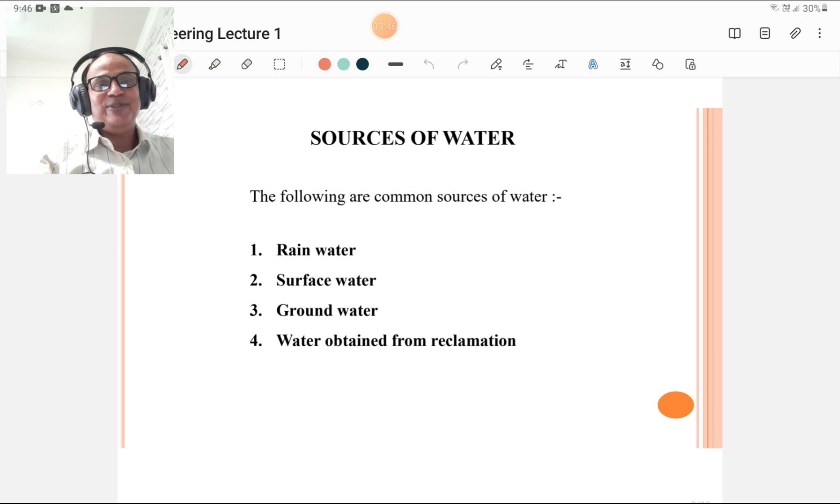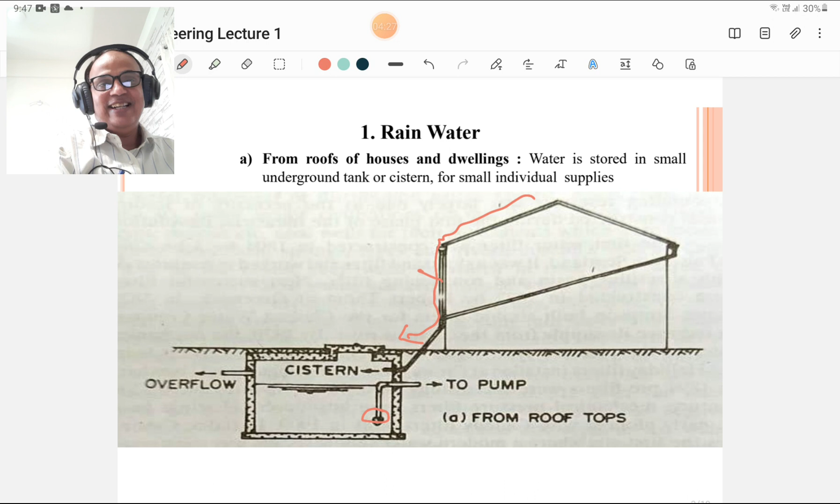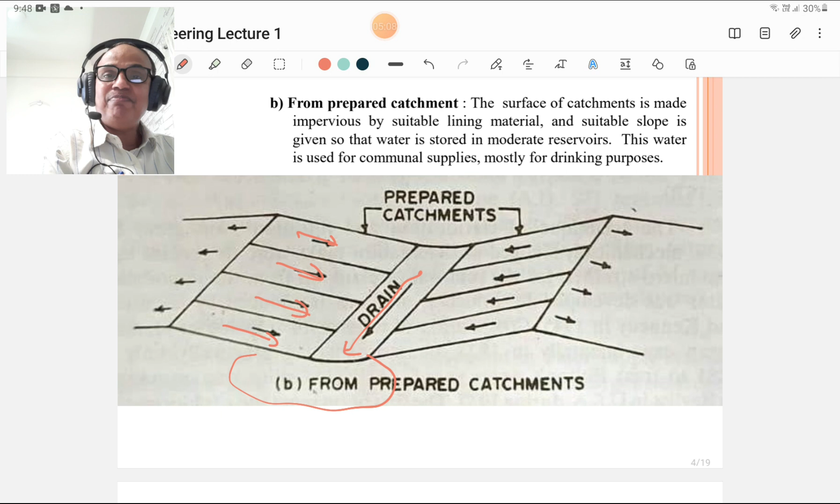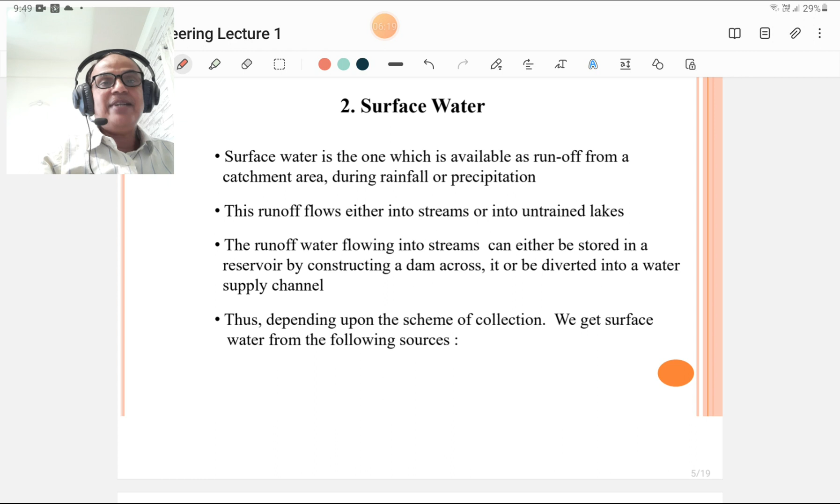Runoff water flowing into streams can either be stored into a reservoir by constructing a dam across that river, or diverted into a water supply channel or canal. Depending upon the scheme of collection, we get surface water from the following sources. Surface water is nothing but rainwater which is precipitated, and we collect that precipitation from the surface.

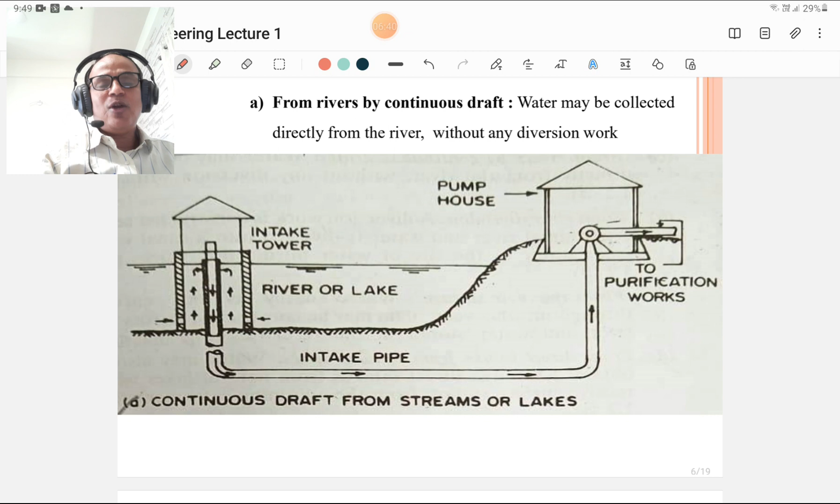From rivers by continuous draft, water may be collected directly from rivers without any diversion work. We can lift that water and collect it. Such as in Solapur district, we collect water from the Bhima river for supplying water to Solapur city.

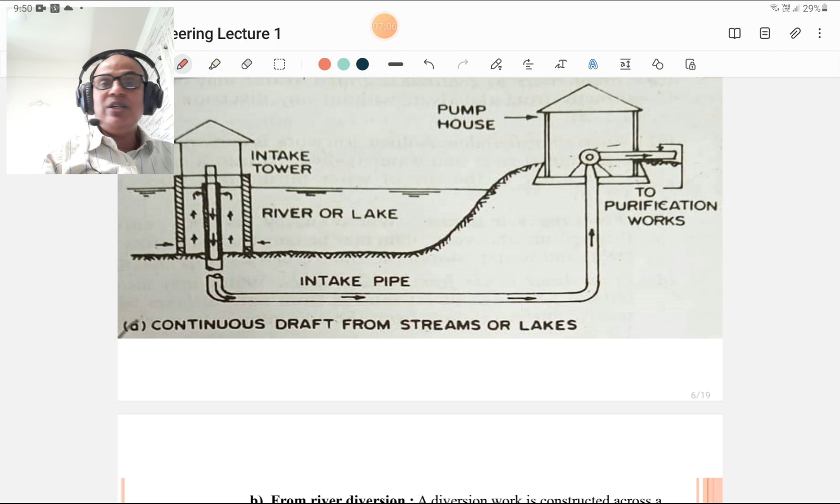But it requires continuous draft. If there is continuous draft, we can lift that water from the jack well and transfer that water to the purification plant, and that purified water we can supply to the city or local people.

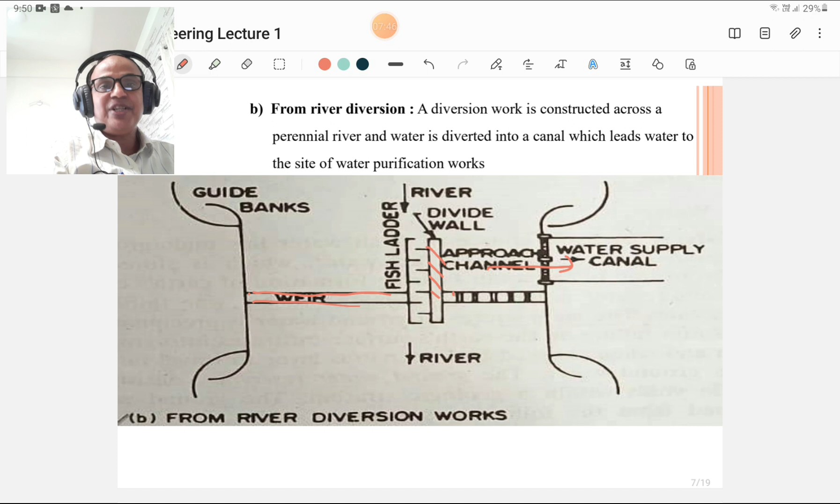Second, from river diversion - we already studied irrigation engineering and we know about diversion works. We have to construct the weir, just like a dam structure. We have to construct the divide walls in that weir, and construct the guide banks also, and divert that water from the river to the canals. Such work is called river diversion work, which leads water to the site of the water purification plant or works.

Third, from reservoir storage, where supply is not ensured throughout the year, a dam may be constructed across the river and water is stored in the reservoir. This is the common and usual procedure because nowadays the supply of rivers is not perennial, so we have to construct a dam across the river and store sufficient water to supply to the city.

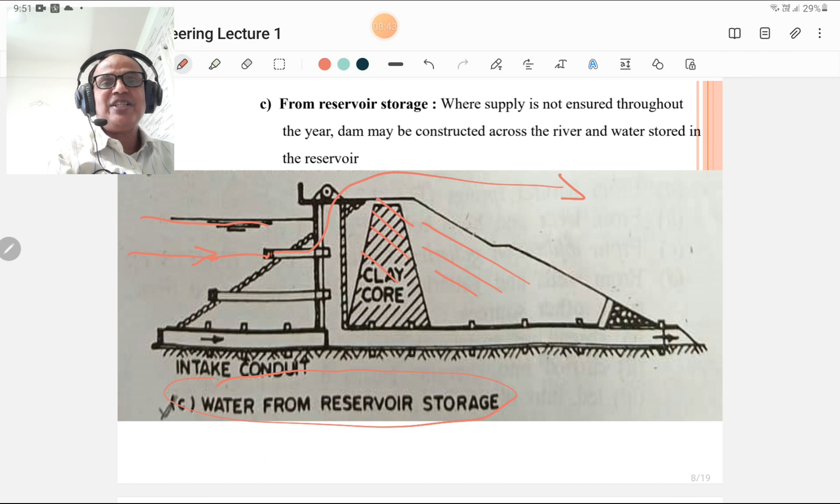This figure shows water from reservoir storage. This is the clay core, or this dam-like structure, an earthen dam, constructed across the river. We collect that water and transfer it to the purification plant to supply it to the people.

Then from direct intake from natural lakes, water may also be obtained through direct intakes from natural lakes which receive surface runoff from adjoining catchments. If there are lakes in the city nearby with natural streams feeding them, we collect water from the lake, which gets water from the nearby catchment. So it requires continuous draft or storage, which is very important for water supply.

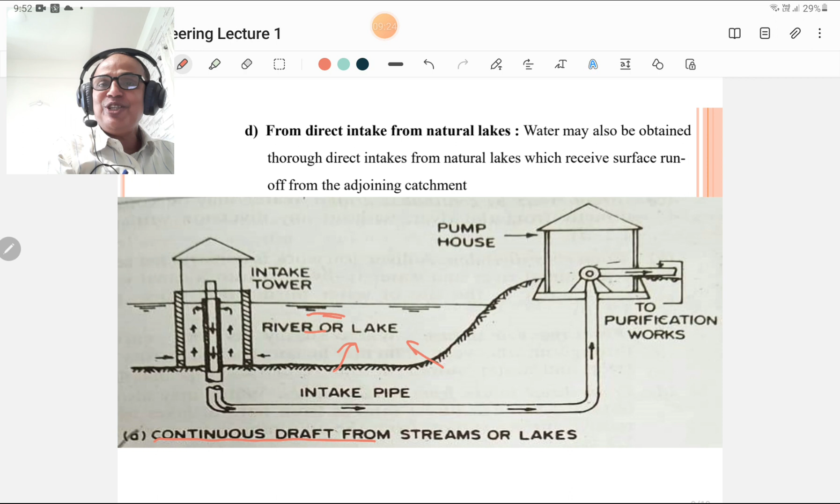Groundwater, which we studied in hydrology also, is the third type of source of supply. This is the largest available source of fresh water, lying underground. The term groundwater refers to water stored by nature underground in the water-bearing stratum or formation of the earth's crust. The total groundwater potential is estimated to be one-third of the capacity of the ocean. So tapping groundwater is very important, but people don't know about this and are not tapping that groundwater.

The main source of groundwater is nothing but precipitation, because in the hydrological cycle, evaporation and precipitation continue forever, and a balance is maintained between these two. Such a cycle of evaporation and precipitation is termed the hydrological cycle, which is very essential for every life.

A portion of rain falling on the earth's surface infiltrates into the ground and travels downward, and when checked by an impervious layer that prevents further downward travel, it forms the groundwater. Any impervious layer allows the formation of groundwater storage. The groundwater reservoir consists of water held in the voids within a geological stratum.

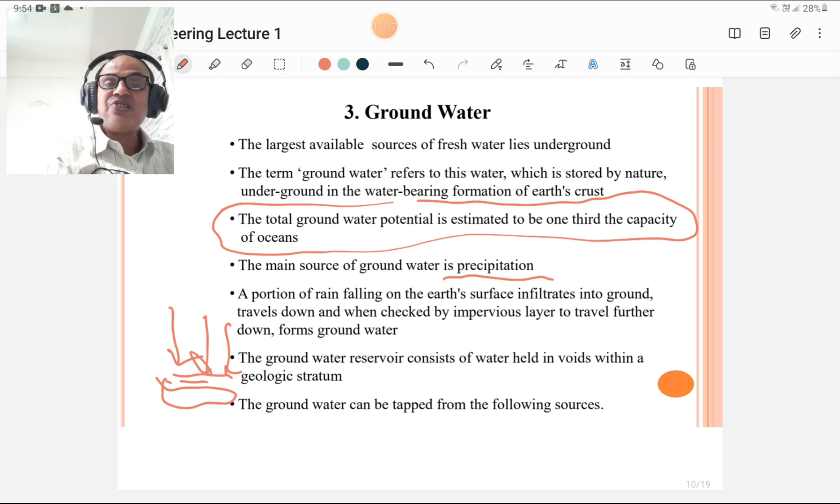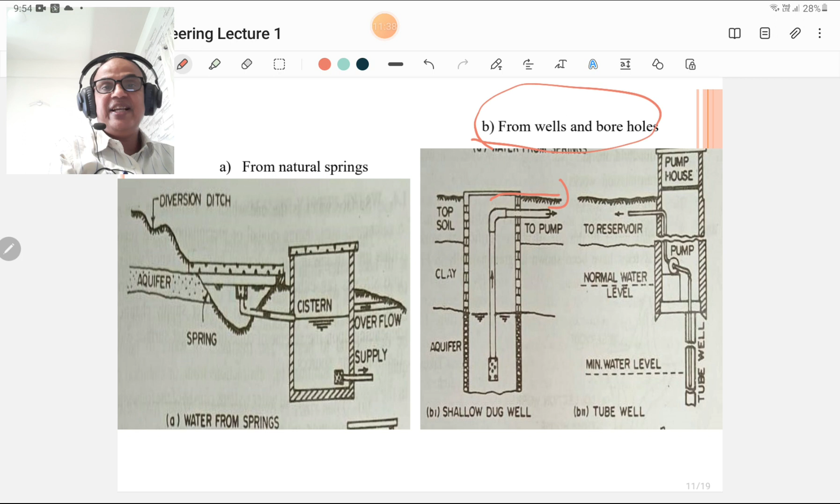The groundwater can be tapped from the following sources. From natural springs, we can tap groundwater. From wells and boreholes, this is very important. Farmers construct wells and boreholes to tap water and use it for irrigation, drinking, and other purposes.

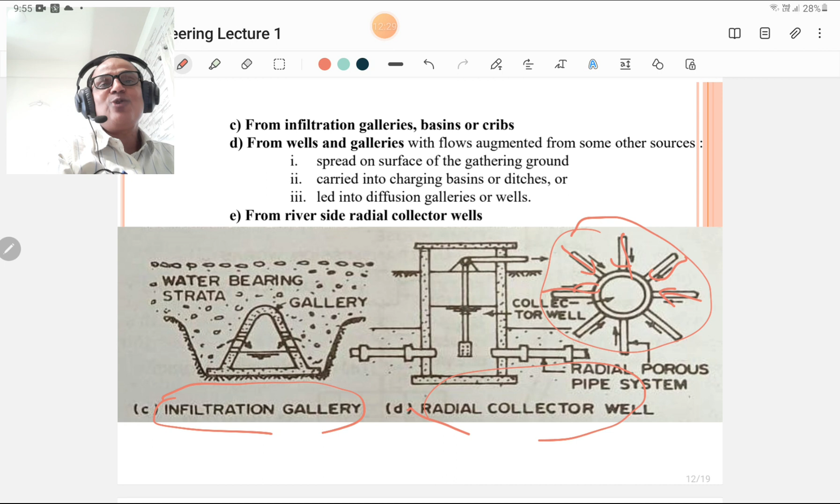From infiltration galleries, basins or cribs. From wells and galleries with flows augmented from other sources, spread on the surface of the gathering ground, carried into charging basins or ditches, or led into diffusion galleries or wells. We also collect groundwater from wells and galleries, or from riverside radial collector wells, which collect water in radial directions. This type of well is called a radial collector well, which is most popular nowadays, and we can also use infiltration galleries to collect groundwater.

Now we discuss the last source of water, obtained from reclamation, which nowadays has more importance. First is desalination. Saline or brackish water may be rendered useful for drinking purposes by installing desalination plants. The common methods used for desalination are distillation, reverse osmosis, electrodialysis, freezing, and solar evaporation. One must study all these methods for desalination.

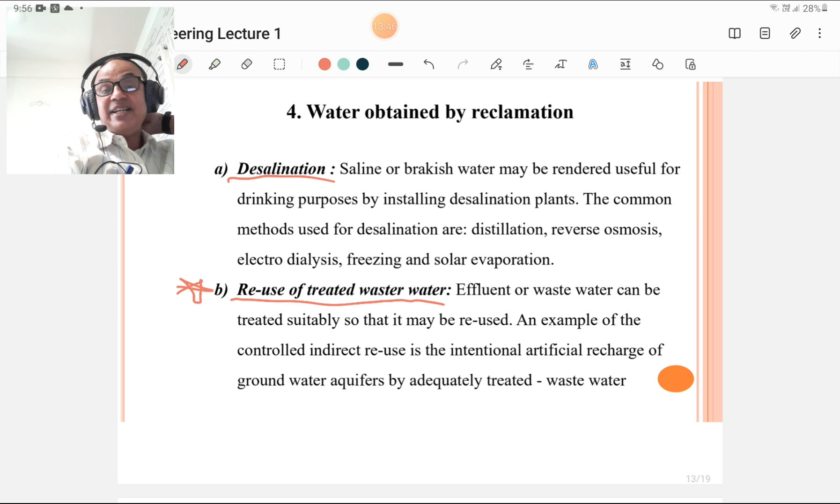Then reuse of treated wastewater, which is most important nowadays. Effluents or wastewater can be treated suitably so that it may be reused. An example of controlled indirect reuse is the intentional artificial recharge of groundwater aquifers by adequately treated wastewater. So we can use the combination of treated wastewater and groundwater obtained from aquifers.

So that is the first part of MPSC Civil Engineering about sources of supply in water supply engineering. Now we are going to discuss in short water supply systems, what we mean by the water supply system, and what its objective is.

The primary objective of water treatment for public supply is to take water from the best available source as discussed above, and to subject it to processing which ensures water of good physical, chemical quality, free from unpleasant taste or odor, and containing nothing detrimental to health. The treatment of water to improve quality includes addition to, subtraction from, or chemical changes in the raw water.

A municipal water supply system consists of the following units. You must know that any water supply system in a city consists of these works: first, collection works; second, transmission works; third, purification works; and fourth, distribution works. You must know these four units for a municipal water supply system.

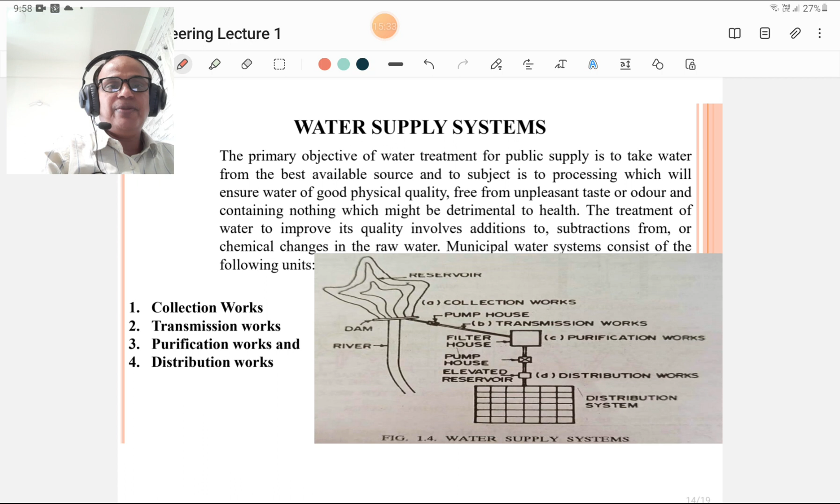First, collection work, or to collect the water. The collection work is meant for the development of surface water or groundwater resources. For major cities, or where water requirement is too large, water is collected from a surface source, mainly from a river or a stream.

If the river is perennial, a direct intake structure can be built into the river bed or in the river bank. If, however, the river is not perennial, we construct a dam so that sufficient water is stored in the reservoir, and water is then drawn from that reservoir or river as per need. The collection work, therefore, consists of storage and diversion work, and very important is the intake structure. So you must study intake structures.

Then second is the transmission work. In many cases, the collection work may be far away from the city where the water is to be supplied. In such cases, water is conveyed to the city through the transmission work. This forms the connecting link between the collection work and purification work. So we have to collect the water and we have to purify the water, and the system in between is termed the transmission work.

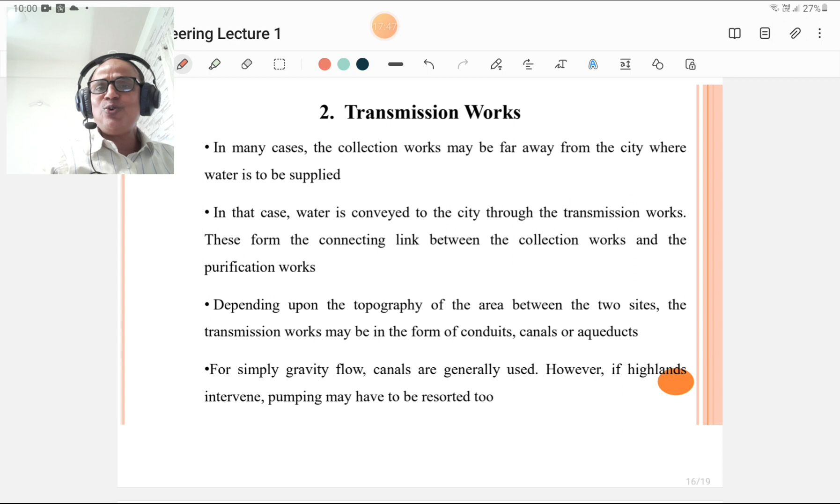Then the third unit consists of purification works. We all know we have to purify the water before it is used for drinking and other purposes. Water collected directly from the source is not safe for drinking because of physical, chemical and biological impurities. So the municipal water works must deliver to the consumer water that is hygienically safe, free from waterborne diseases, aesthetically attractive and palatable, and economically satisfactory for the intended use.

That is also important. Diseases like typhoid, cholera, dysentery, etc. are waterborne diseases, and the principal aim of purification work is to supply clean, bacteria-free water to the people. The common components of water purification work are the aeration plants, then filtration plants to remove objectionable color, turbidity, bacteria and other harmful organisms. Then we have to do sedimentation also.

Deferrization and demanganization plants are required to remove excessive amounts of iron and manganese, and softening plants are also required to remove the excessive amount of scale-forming, soap-consuming ingredients like calcium and magnesium ions. But basically the water purification system of a municipal city consists of an aeration unit, a filtration unit, before that a sedimentation unit, and there must be some processes like chlorination and others.